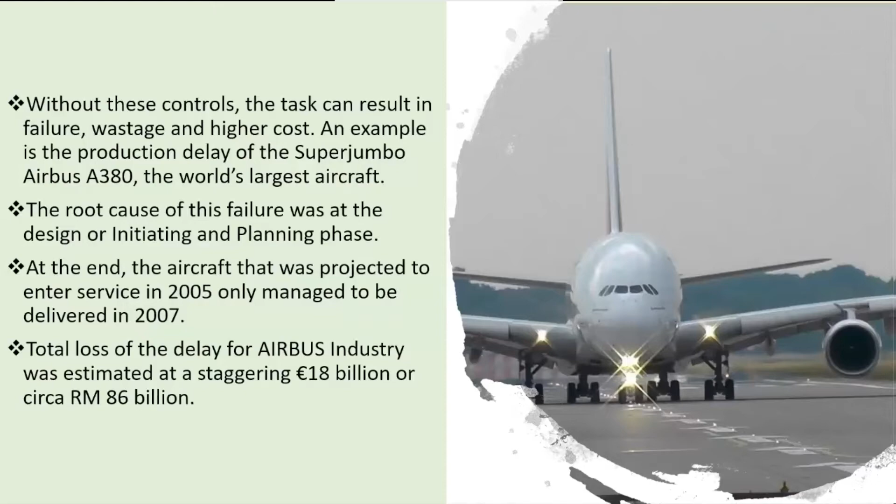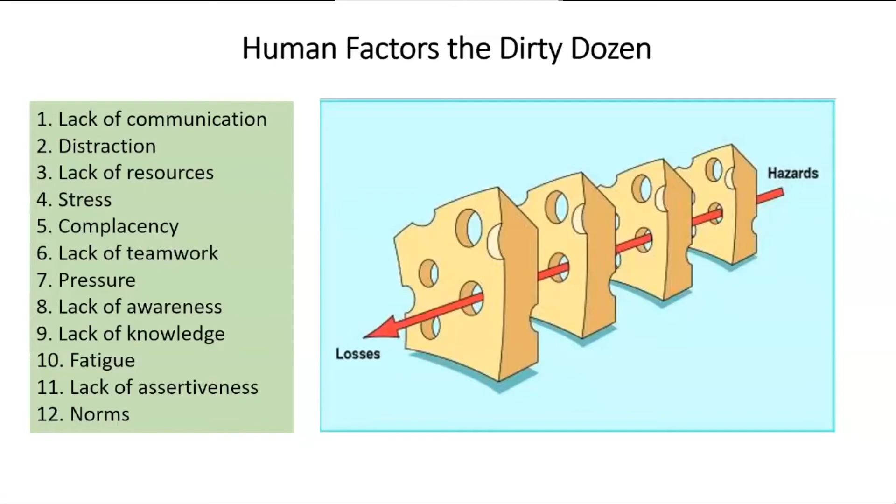Actually, norms also plays a very big role in causing this alignment of the Swiss cheese holes. Because of our daily practice, we think that we know about it, so we do not adhere to the plan, we do not adhere to our initiation, planning, controls. We lose quality control simply by means of norms, and this affects everything else we have been working on.

In the field of aircraft maintenance, the principles of project management are applied at each stage of a given task. How this varies with other fields is a matter of importance emphasized by the governing regulatory bodies. In our aircraft maintenance, the governing bodies are CAAM Malaysia, could be EASA - European, or the FAA, or any other governing body of the particular country.

So the task, by definition of PM, must have a definitive goal and is time limited. The task itself is further constrained by requirements to meet the highest standard mandated by approved documentation - could be maintenance manual, troubleshooting manual, which for Airbus we call TSM. Then we have FIM, fault isolation manual, for Boeing, airworthiness directives, and so on. Completion of the task must then be certified in accordance with the aviation law stipulated by the governing body of the concerned country. Each task itself is categorized as a project, and each aircraft maintenance engineer, AME or LAE, is a project manager.

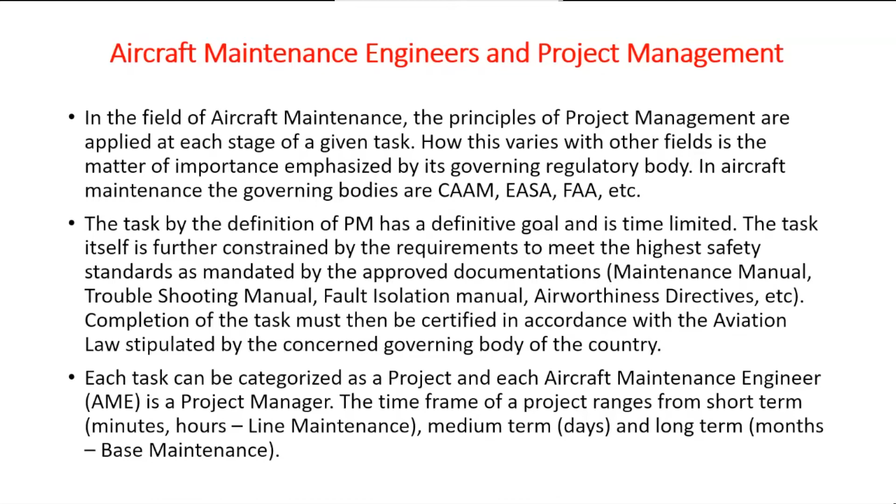The time frame of a project can range from short term - minutes, then hours, that's for line maintenance. We have medium term in terms of days, and longer terms even months for base maintenance or any other project like a conversion, for example passenger to freighter, PTF conversion - those are longer term projects. This is basically the criteria: we have a time frame which is short term, medium term, and long term. This is a very simple description of the different time frames we're talking about.

From the perspective of line maintenance, we have the transit check. The transit check itself can be from 25 minutes, depending on the low-cost carrier - I know some low-cost carriers have a turnaround time of 25 minutes - or it can be up to 1.5 hours for a regular airline. Even for us at Etihad Airways, for our Boeing 777, the transit time can be about 1.5 hours.

An A check, which is bigger than the transit check, can be between 400 flight hours to 750 flight hours, depending again on the type of airline or type of aircraft being used. The check duration can go up to approximately 8 hours. So the duration between checks is 400 to 750 flight hours, but the duration to carry out the A check is 8 hours.

Coming to the next one - C check. C check is a bigger check, much longer term. It is between airframe hours of 2,000 flight hours or between 20 to 24 months, whichever comes first.

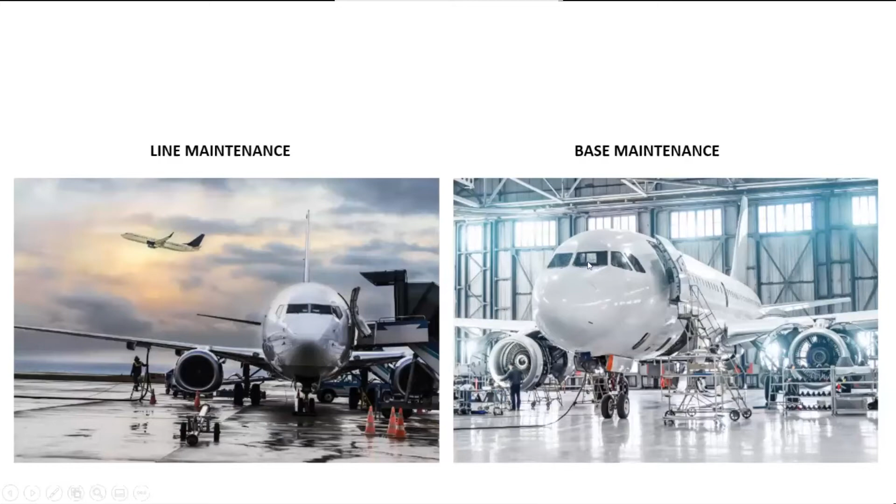Each project falls under the category of what we call scheduled and unscheduled maintenance. Scheduled maintenance is mandated by a maintenance program of the aircraft. ICAO, the International Civil Aviation Organization, defines a maintenance program as a document which describes the specific maintenance tasks and their frequency of completion, necessary for the continued safe operation of the aircraft to which it applies. These are periodic maintenance tasks that must be completed to ensure that the aircraft remains airworthy.

So this is a scheduled task. It's scheduled, like it says, it's mandatory. You've got to do it. It has to be done according to a plan.

Unscheduled maintenance, on the other hand, is a non-routine task, such as damage experienced by an aircraft during flight due to a bird strike, maybe a lightning strike, system failure, or even more recently when we park all the aircraft all over the world. Each parked aircraft itself has further time-related maintenance tasks which are stipulated in the maintenance manual. So what I'm trying to say here is we categorize the checks into two different types of maintenance: one is unscheduled, the other one is scheduled. So these are the two different categories that we have here.

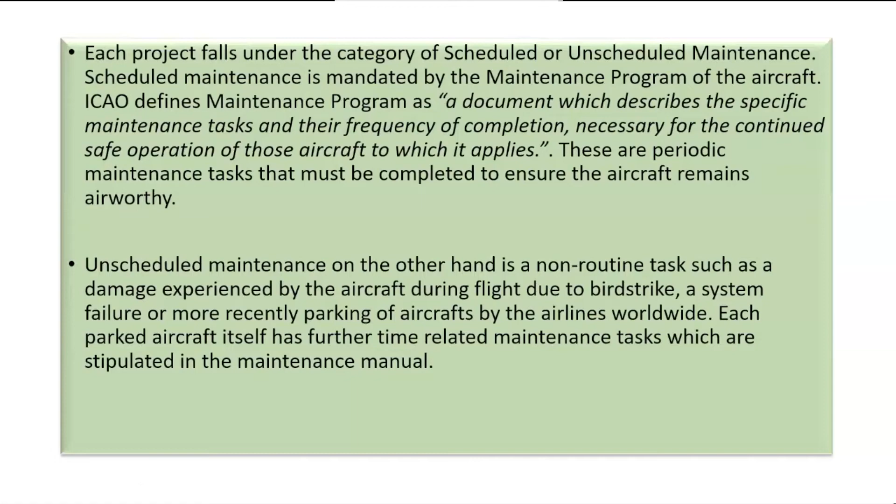Okay, we're going to have a short look at a transit check, what it looks like. The reason I'm focusing on transit check is basically because all my time has been spent in line maintenance. Let's play a small video here, we can see.

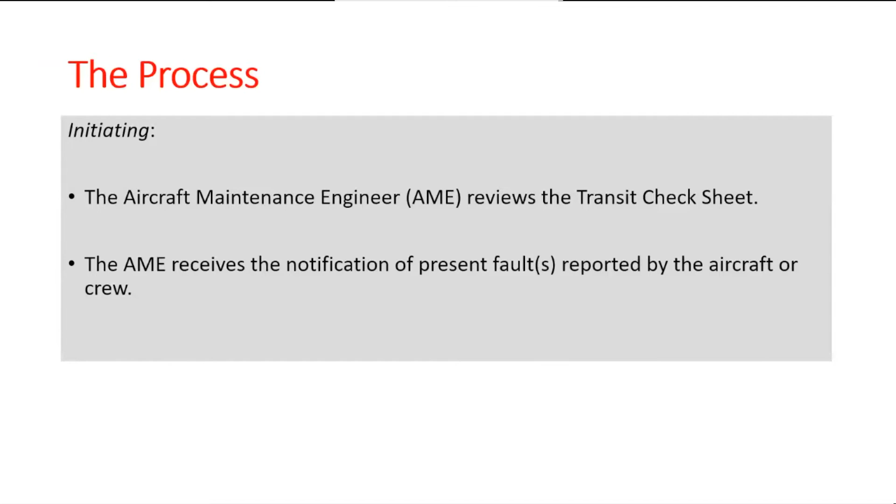So the LAE has to prepare this. It's an initiating stage. So he prepares it, he's gathering all the information now. So the planning phase is more elaborate.

In the planning phase, the LAE evaluates if the reported faults can be legally deferred as per the MEL, the minimum equipment list, what we call. This is a document that allows the aircraft to be dispatched, with the minimum required item or system redundancy, which can be dispatched without delaying the aircraft.

Basically, the LAE evaluates the fault and determines whether the MEL can be applied or the fault must be rectified. The MCC plays a very great role here, where they can check and inform the LAE that this is not an MEL item, so it must be rectified before the next flight.

If not, the aircraft is AOG, aircraft on ground - it is not fit for dispatch. The AME advises the supervisor on the nature of the defect, required manpower, and the spares.

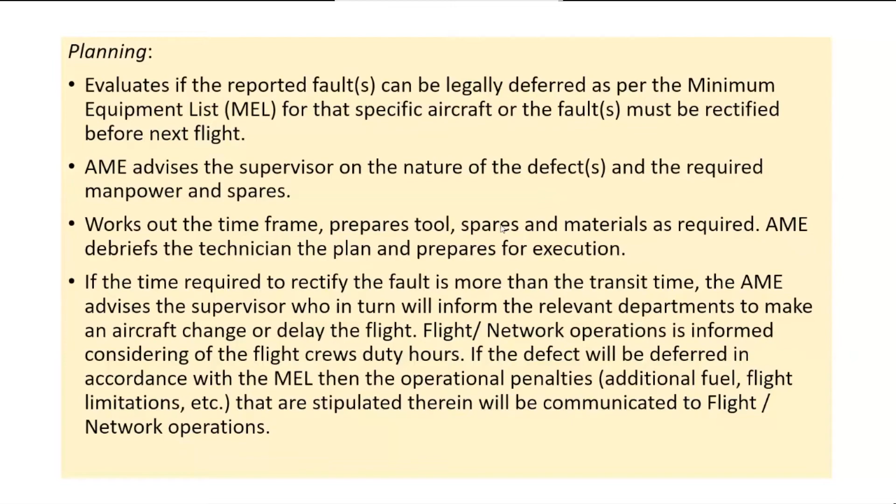So if the defect is deferred in accordance with the MEL, then the operational penalties, like additional fuel or flight limitations that are stipulated, will be communicated to the network control operations. There are a lot of things we got to see during the planning phase. This is one of the most critical parts before the aircraft arrives, doing the planning to ensure the transit or dispatch is taken care of neatly and nicely.

The next will come is the executing phase. In the executing phase, this is the real action. The AME and the technician are at the bay approximately 15 minutes prior to the estimated time of arrival. It can be 10 minutes, depends on the time, but we can take 15 minutes as an example.

The LAE arrives to the bay. They have to go to the designated bay to do a scan, to ensure it is clear from foreign object debris and the equipment is all ready as required. After the arrival of the aircraft...

the AME and technician perform the transit check in the sequence as stipulated in the transit check sheet, like what we have seen earlier. We have the arrivals, we have the exterior checks. There are sequences that the LAE has to follow, assisted by the technician.

The AME receives the debriefing from the crew on the technical status of the aircraft. Communication between the crew and LAE is very, very important. So when the LAE arrives and receives the aircraft, the crew will give a quick debrief about what the fault is. The LAE then will go up to the flight deck and review the defect and get a complete debrief from the crew on the technical status.

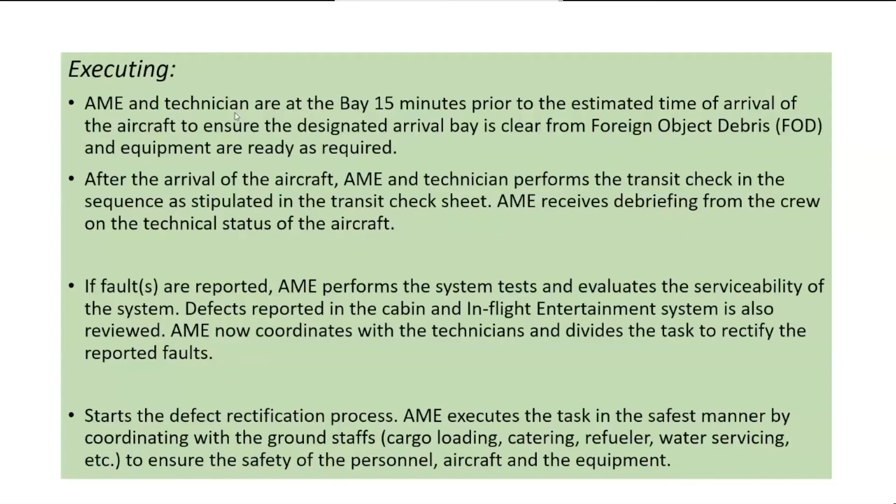Then he also has to monitor and control. The LAE also works as quality control, to see that the technicians are doing a correct job in accordance with the manual, that the component is fitted correctly, that final testing has been done, making sure if it's a hydraulic component there's no leak. There's a lot involved, and the executing part is one of the biggest stress factors at this particular point—monitoring and control.

Work in progress. The AME now shifts to monitoring and controlling of the project. The monitoring and controlling is not a single entity by itself - it's actually a loop between the planning and the execution. There's monitoring and control during planning, and monitoring and control during execution. So the LAE, or AME, Aircraft Maintenance Engineer, acts as a project manager in a very short, given 45 minutes span of time, to juggle between states. So in monitoring and controlling, the work is already in progress.

Throughout this process, the most important component is effective communication. It cannot go wrong, like what we saw in the human factors dirty dozen - one of the things is lack of communication. The most important thing during this phase between planning and execution is effective communication. Must communicate effectively. The AME monitors the job, checks and rechecks.

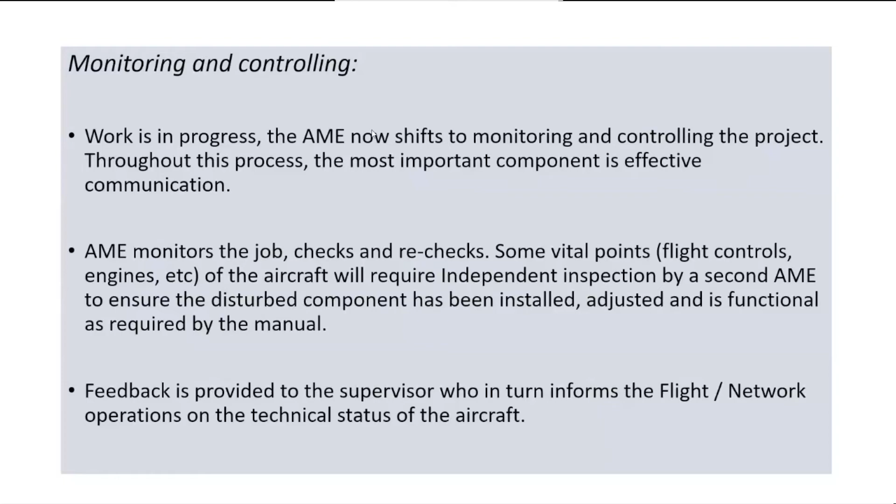On the closing part, now that everything is done - the component has been replaced, it has been tested, everything is fine, communication has been given, the aircraft is good to go - the task is now completed. This is the closing section of the task, of the transit check. We looked at the transit check. This is the closing part of the transit check, where in project management it comes as closing.

So how does it translate to the AME, to the transit? The closing is that the task is completed. The AME and technicians review this together - they review the system integrity and serviceability. Flight crew is advised on the status of the aircraft. The AME prepares the flight for departure.

At this phase, basically, the aircraft is declared serviceable. So then the rest of remaining things continue, whether it's baggage loading or refueling. Passengers will start boarding. So everything has been tested, everything is good to go. This is the closing section of the transit check.

What did we see so far from the beginning to the closing? We started with initiating, we went through planning, executing, monitoring and controlling, and finally closing.

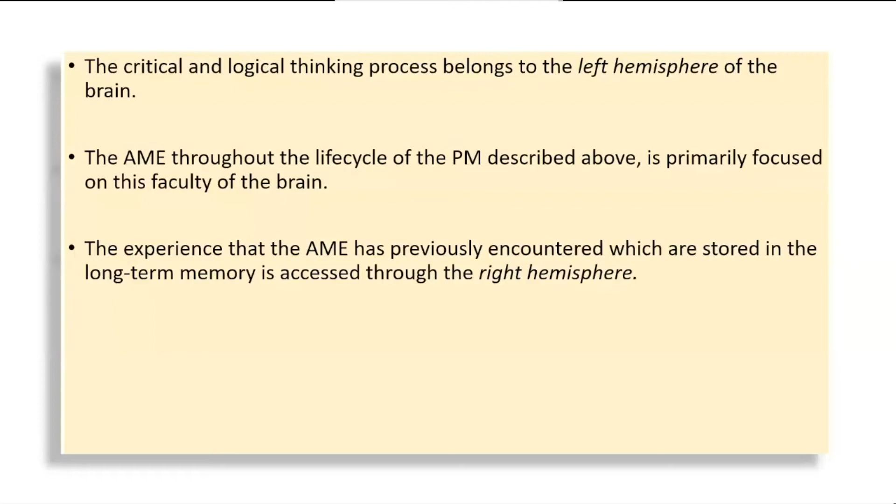As I described earlier, the critical and logical thinking process belongs to the left hemisphere of the brain. The AME, throughout the life cycle of the project management described above, is primarily focused on this faculty part of the brain. The experience that the AME has previously encountered, which is stored in the long-term memory, is accessed through the right hemisphere. So what do we see here basically - an LAE or AME is able to use both sides of the brain very, very effectively, left and right, very quickly, very swift. This goes a little bit deeper, but this is actually happening in the background.

Some might call it a pseudoscience, but it is not - it's measurable, this is data that can be extracted. I'm not sure if anybody has done any studies using EEG to find out what the brain pattern of an LAE looks like during his operations. But they've done a lot for the pilots actually - pilots have been studied a lot with neurofeedback. These are the patterns derived from the neurofeedback, biofeedback sensors.

In Australia, Qantas experimented with a lot of their pilots during COVID-19 to see what happens. They put EEG machines on them to find out the alertness of the pilot during takeoff, landing, and critical phases of the flight. For an LAE or an AME, this is the same, because this pattern exists for everyone.

We spoke about the brain. The brain has two hemispheres, left and right. But behind the whole functionality of us as humans, we have these patterns that control us. For alertness, for example, we have beta waves, between 16 to 30 hertz, which contribute to alertness, concentration, and cognition.

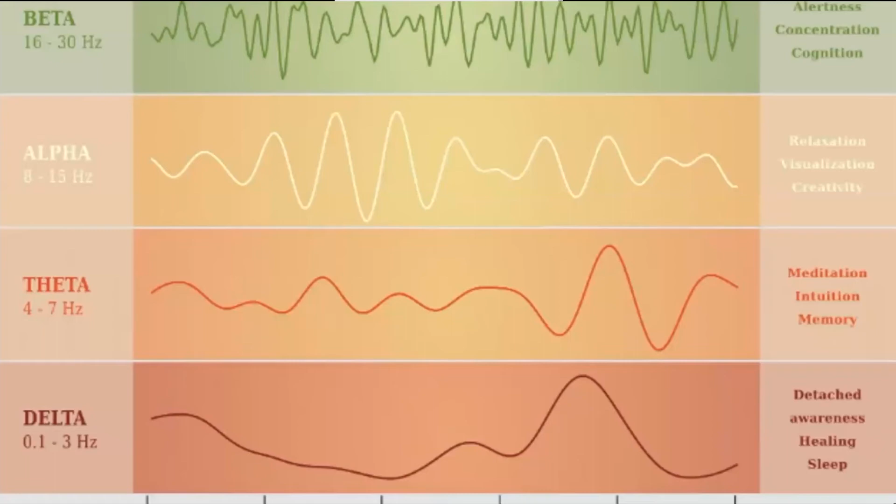On the next part of this section, know that I've been exploring a lot about the mind itself because it plays a very interesting role in what we discussed and why LAEs are very good at this. You'll find a lot of LAEs actually like to explore into thinking without them realizing it's because of the nature of their job.

He says we can actually visualize that we are wearing different color hats. For example, if we are going to a meeting and have to present a decision or data to the management about certain facts, I don't think we can be wearing a black hat. What is required is to flip the hat to a white hat, which is more suitable here. So just wear the white hat and go in. It's all about facts.

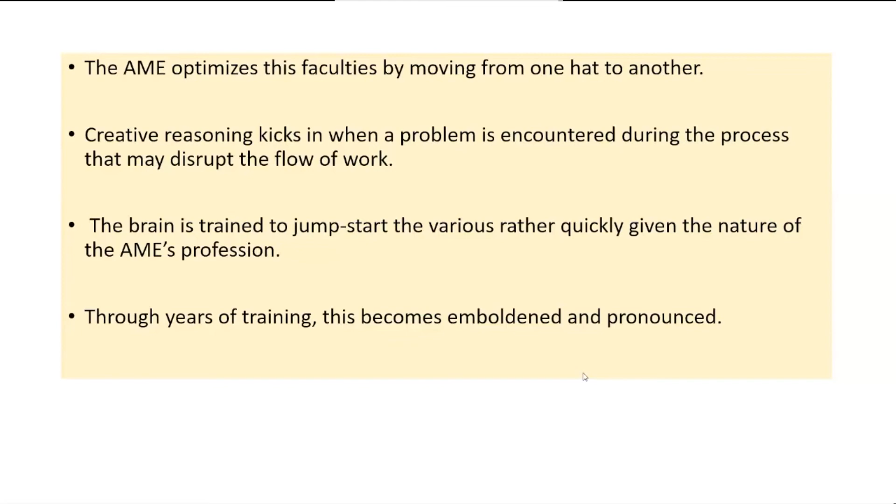So this comes to the conclusion of my talk. An AME goes through rigorous technical training, both theory and practical, and is subjected to assessments by the authority and the organization. The work itself requires in-depth application of aircraft engineering and system knowledge, professional skills, and continuous learning attributes. Thus, the need to understand technical language, logical thinking, and other factors as described in this webinar makes an AME the fittest project manager available. It's true. The well-trained AME not only can execute aircraft maintenance projects, but may also well adapt into other projects.

While the knowledge in the field counts, the experience and training in the making of an AME is the key to success as an effective project manager. And I here do conclude my talk here. This is the last slide I have.

Okay, thank you. Wow, TS Siva, I didn't know that as an LAE I can think right to left and left to right for technical thinking, and this is new to me. Anyway, thank you, TS Siva, for the interesting insight on this topic - very in-depth, very informative slides, and very enlightening on the subject. But I must mention one thing, TS Chin - I think I started the webinar without even introducing myself, right?